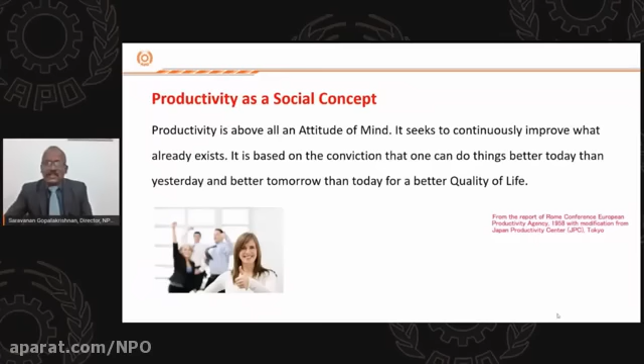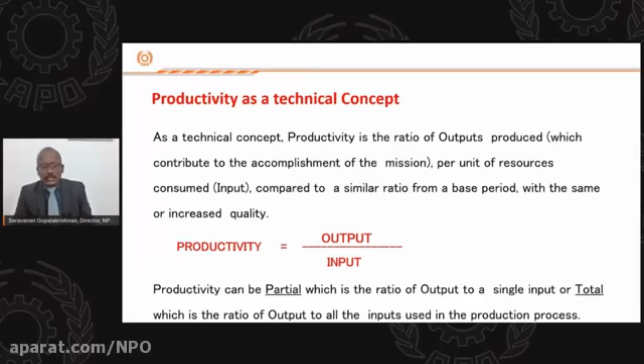So this is not the only perspective. If you see the technical concept of productivity, the explanation is that productivity is a ratio of output by input. Whereas output is only one factor, the input is not only one thing. Our productivity can be increased by reducing the input. The input is a combination of various factors like C, L, E, M, S, where you can see the definitions.

C stands for capital, L for labor, E for energy, M for material, and S for other services. When we are focusing on improvement of productivity, or on continuous improvement, we can reduce the input. The input can be reduced by reducing any factor or many factors. For example, let us discuss a hypothetical situation where energy and material remain constant, and if we are focusing only on capital, labor, and other services, certainly there will be improvement in productivity and there will be continuous improvement. But we tend to consume the same level of energy and the same level of resources.

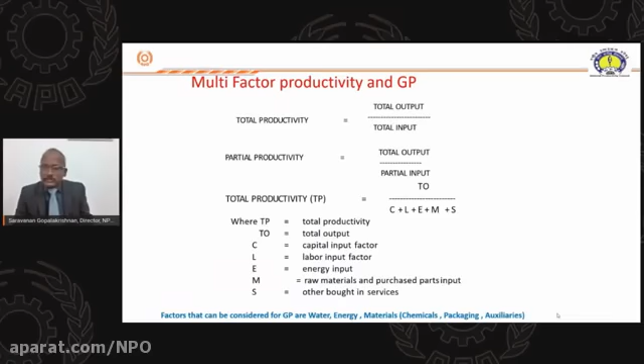Now the question which comes to our mind is: is it sustainable? Now we are having continuous improvement, we are having improvement in productivity. Is the development sustainable? So instead of merely focusing on productivity, where the focus is on reducing some factors of the input, we started speaking about green productivity.

In green productivity, the thrust is given on the reduction in the factors of input, which are energy and material. For example, if you reduce the energy or the material, which are finite in nature, if we can conserve this energy or conserve this material, we are not only looking at development, we are looking at sustainable development, which meets the needs of the present without compromising the ability of future generations to meet their own needs.

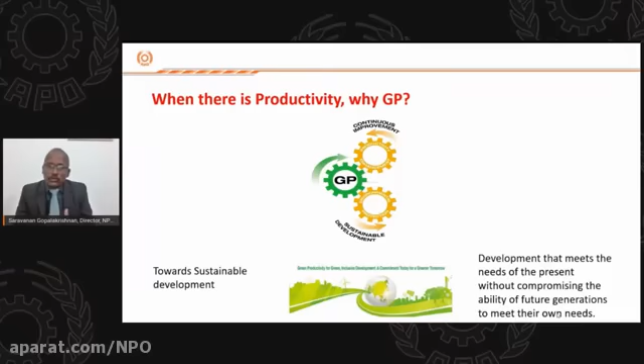So when productivity is focusing merely on continuous improvement, green productivity is focusing on two sides. It is focusing on continuous improvement also, and at the same time, it focuses on sustainable development also. So we will have multiple benefits out of green productivity.

This green productivity is a concept propagated by the Asian Productivity Organization, whereas similar tools, technologies, or techniques are followed by many countries or multilateral agencies, calling it by different names. These other names include pollution prevention, waste minimization, cleaner production, waste reduction, and eco-efficiency. Even in India, in the last portion of the 20th century, the Government of India encouraged organizations to adopt a similar concept through waste minimization circles. What we're discussing now is similar to waste minimization, but the name given to this concept is green productivity.

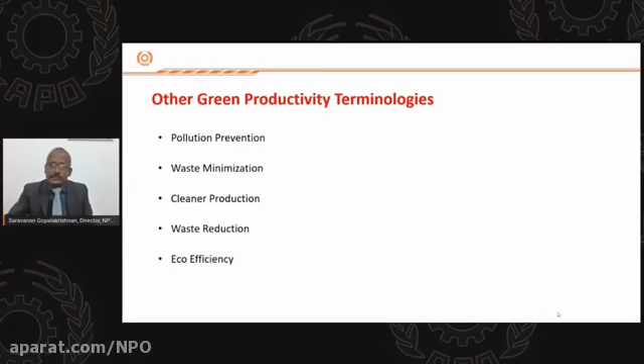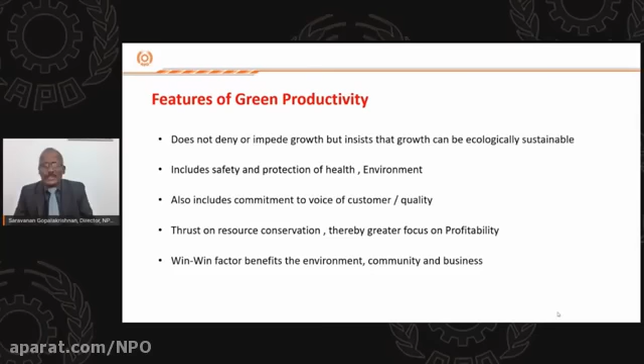What are the important features of green productivity? For example, tools which tend to reduce emissions or material consumption often don't focus on profit or such things. Whereas green productivity, when focusing on reducing emissions or material consumption, in no way impedes growth. It also focuses on profitability, and gives due importance to safety, health, and environment. So it's a win-win factor for the environment, the community, and also business people.

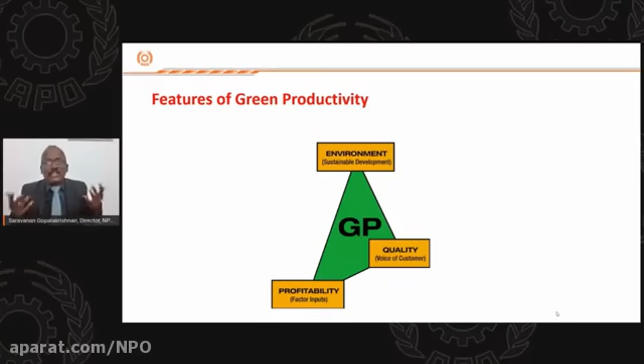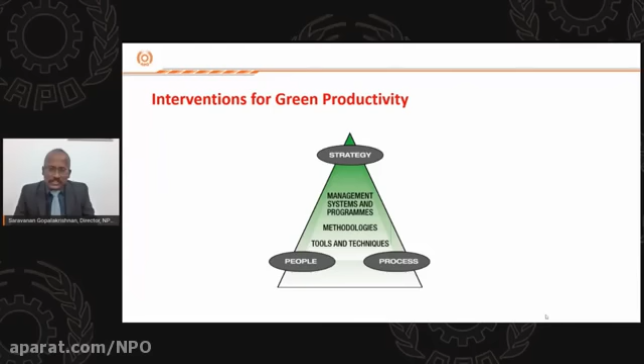So when there is much benefit from green productivity, how can organizations implement it? What should be the intervention for green productivity? There are three important stakeholders: one is people, the other is process, the third is strategy. By selecting or involving people through a good process and a well-defined strategy, green productivity can be attained by the organization. Towards attaining this, there will be a lot of tools, technologies, techniques, methodologies, and also systems and programs.

In a nutshell, logically speaking, how do we achieve green productivity? The first step is to identify where the wastes or emissions are generated. The second is why the wastage or emissions are generated. The third is to find a way these wastages or emissions can be eliminated. Logically speaking, these three are the main things: first, identify where wastages are coming from; second, why they are coming; third, whether it's possible to eliminate them. If it's not possible to eliminate, can we at least minimize the wastages? This speaks about the total green productivity.

As mentioned in the previous slide, a variety of tools and techniques could be used towards green productivity. Some time-tested tools aimed at reduction of wastages can be used for attaining the objective of green productivity as well. Such tools are lean manufacturing tools, and also one important tool called material flow cost accounting.

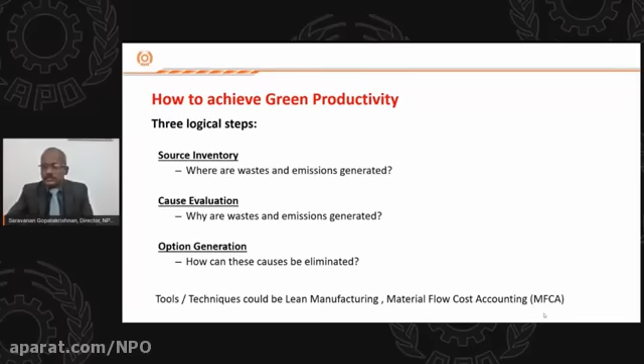I am very much fascinated by one important quote of Mr. Picasso, a well-known artist. As a green productivity practitioner, I am fascinated with his quote where he describes art as removing unnecessary things. As a green productivity professional, my role or intention is also to identify the unnecessary things, identify the wastages, and eliminate them.

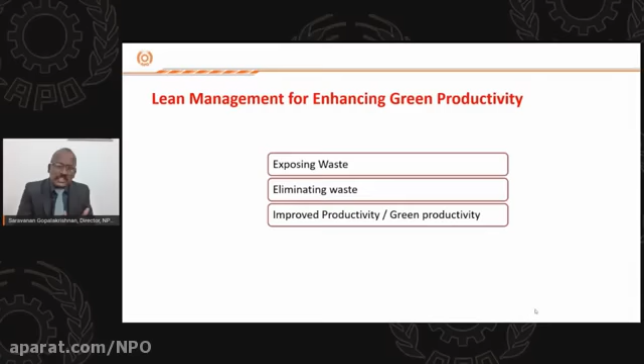We are going to discuss two tools or techniques: one is lean management, the other is material flow cost accounting. Let us start with lean management. This lean management is nothing but a set of tools and techniques aimed at exposing the waste and eliminating it towards improved productivity, or green productivity.

If we have to implement lean, we should be very clear with one important terminology or concept. One is value added activity and the other is non-value added activity. If you go to any organization, there will be a lot of activities happening, but can we say all activities are adding value to the process? Certainly not. Value added activity is the activity for which the customer is interested to pay. Non-value added activity is the activity happening in the process about which the customer is not interested, or he or she is not going to pay. Such activities can be termed as non-value added activity, or Muda.

So if you see, lean has a set of tools and techniques which can be aimed to identify different types of wastages. Some tools can be used to eliminate some set of wastages also.

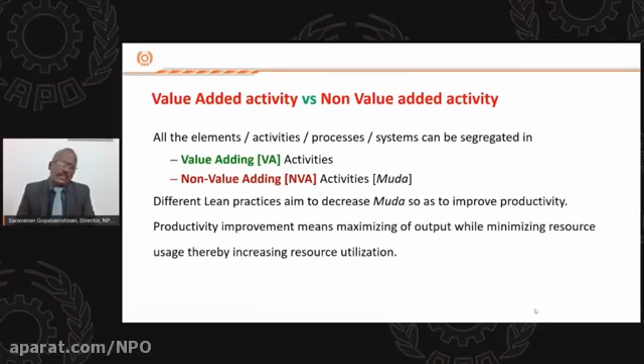If we have to define lean based on the previous slide, lean manufacturing or management can be defined as a systematic way to deliver highest quality of products at lowest cost with the least lead time, with the relentless elimination of wastages. So lean focuses on quality, cost, and time. All these three things are going to be achieved by relentless elimination of so-called wastages.

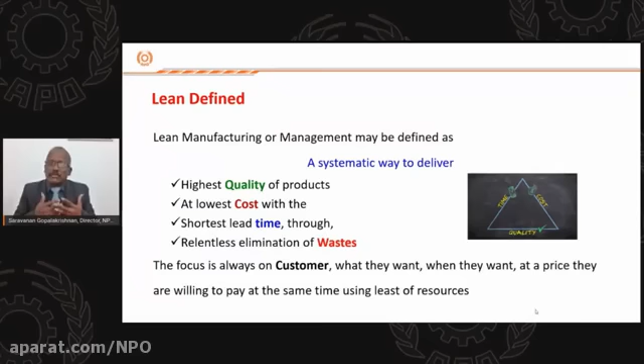And the additional or important thing with respect to lean is the focus is always on the customer - what they want, when they want, at a price they are willing to pay. You can see the last thing, using the least resources. So when we are using the least resources, our end objective of green productivity also will be attained.

If you see this lean concept, as per lean manufacturing, there are 7 different types of wastages. Those wastages can be described as overproduction, excess motion - it may be the motion of operator or machine - excess waiting, which can be the waiting of operator or machine, excess transportation, mostly predominantly material being transported in organizations, over processing, excess inventory, and defect, rework, or scrap.

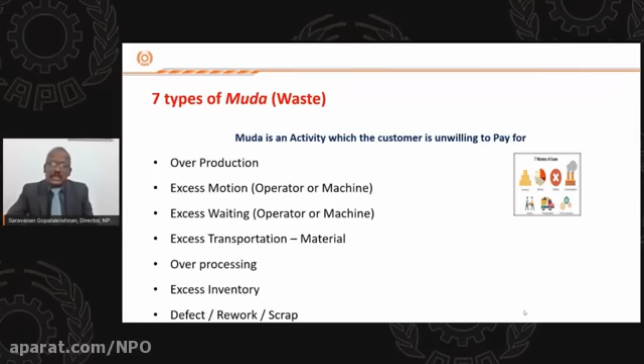If you go to any industry and ask about waste, by and large people feel that defect, rework, or scrap is the only waste in their organization, whereas they are not concerned about the previous 6 types of wastages. But as per lean, all these 7 are equally important and have to be identified and eliminated. Let us see one by one.

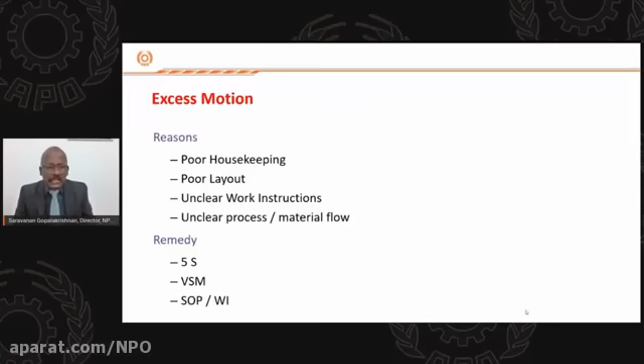The first wastage is excess motion. What could be the reasons for excess motion? It may be because of poor housekeeping, poor layout, unclear work instructions, or unclear material flow. If these reasons are prevalent in the organization, there is some remedy from lean manufacturing - this could be 5S, value stream mapping, SOPs, or work instructions.

The second important waste as per lean is waiting. It may be because of the operator or machine. The main reasons for waiting may be imbalanced line, excess workforce - the workforce may not be flexible - unscheduled maintenance, high setup time, and also sometimes shortage of material or manpower.

If these are the reasons, then the remedy for removing waiting is line balancing, value stream mapping, total productive maintenance - this will help you improve your maintenance practices and increase machine availability - and SMED, single minute exchange of die. So if there is any problem with your setup time taking too long, that can be reduced through SMED.

Just in time - for example, if you are getting the material too much in advance, it has to wait till you start focusing on it for the operations. So on the other hand, if you are having a practice like just in time, it will help your vendor give the material in the stipulated time, so that unnecessary or unwanted waiting of material can be avoided.

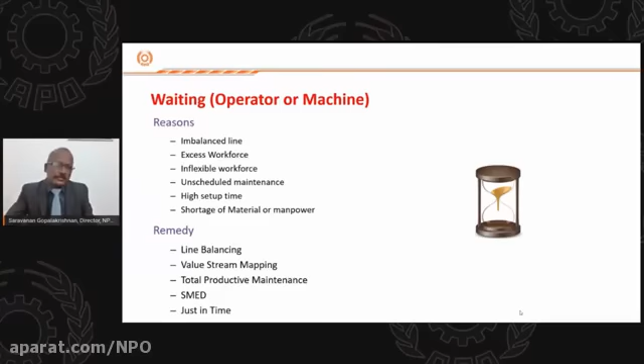The third, and most cruel waste in the organization, is transportation, because transportation is mostly of material. Because of transportation, sometimes there are damages happening to the material. It is affecting the safety of the workers also. It involves sizable resources - in some organizations they use energy for transportation. So this is the most cruel wastage as per lean.

If you want to improve your productivity or implement lean, one of the first steps could be to identify wherever you are having this unwanted transportation. The reasons for excess transportation could be poor layout, poor route planning, distant suppliers, and line imbalance.

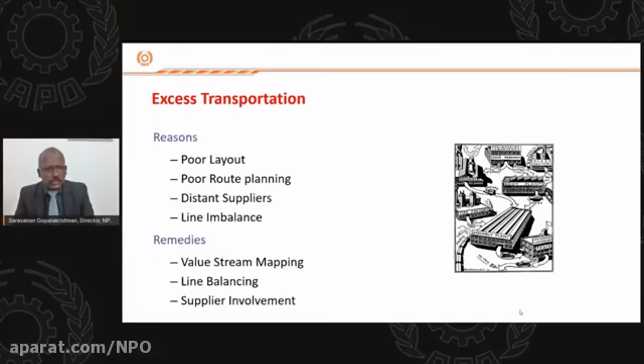The remedies for these reasons could be value stream mapping, line balancing, and also supplier involvement.

Another type of waste as per lean is over processing. The reason is unclear customer specification. If your operator or organization does not know the exact requirement of your customer, you will tend to do as per your perception, so sometimes you will do over processing. Other reasons could be frequent design changes and excessive quality changes. Whenever there are frequent changes, people are not clear what they are supposed to do. To be cautious, they start doing excess, which results in over processing.

There is also inadequate value analysis. Whatever you are giving to the supplier should fetch you some value, or give some value to the customer. For example, if I am doing something for $1, is it worth only $1? For selling something at $1, I should not start processing equivalent to $1.5. So there should be some value analysis also.

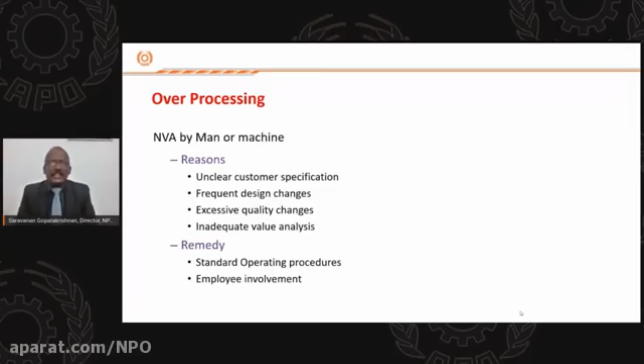So the remedy for over processing could be standard operating procedures and also employee involvement.

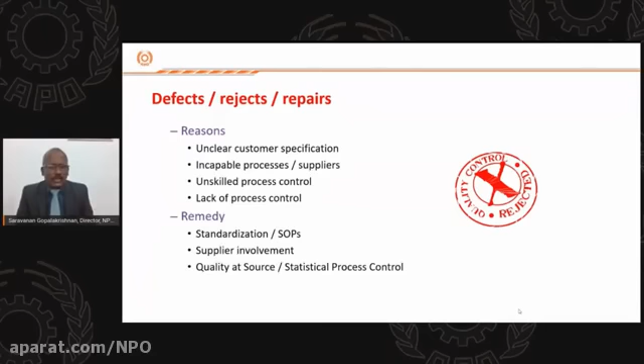The other normal wastages prevalent in the organization are defects, rejects, and repairs. The reasons may mainly be lack of process control, unskilled process control, incapable process, and sometimes unclear customer specification. The remedy for these defects is standardization, supplier involvement, quality at source, or implementation of tools and techniques like statistical process control.

The next type of waste as per lean is excess inventory. The problem with this inventory is that it may be raw material, WIP or work in process, or finished goods. There are two main problems with excess inventory. One, whenever we store things for more time, there is a chance the material can deteriorate, resulting in loss of material due to storage over time. Second, whenever you store material, you are blocking capital. Nowadays organizations have a problem of cash flow. So whenever you reduce inventory, you have two benefits: you prevent material from unwanted damage or deterioration, and you increase the cash flow of the organization by avoiding blockage of capital.

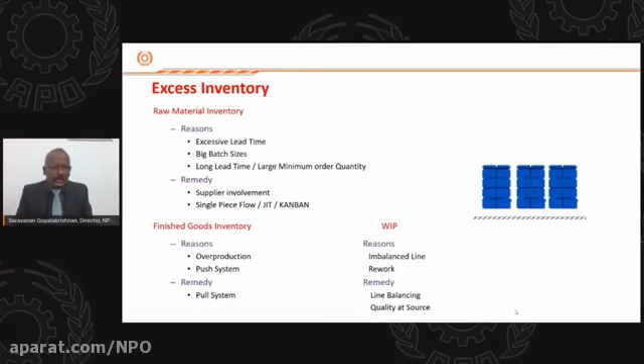So the remedy could be concepts like JIT, Kanban, line balancing, and pull system.

Similar to inventory, whenever you are producing more - for example, if I'm supposed to sell 10 units but I make 20 units of that product, 10 units will be sold to the customer and the remaining 10 units will be stored in my warehouse. The reason for this could be push system and unclear customer requirements. Again, similar to inventory, there are two main problems: whatever product I am storing in my warehouse can become outdated, can get damaged, can get deteriorated, and second, I am blocking capital. So lean is aimed at avoiding overproduction.

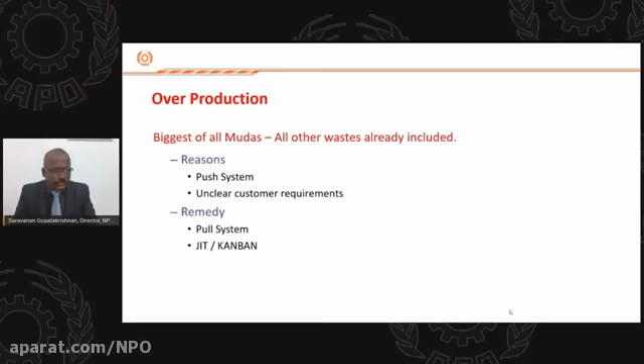That could be achieved through pull system or concepts like JIT and Kanban.

So in the past 10 minutes, we have discussed 7 different types of waste. If anyone is interested in the implementation of lean and eliminating this wastage, what should be the way forward? The first thing should be you visit your shop floor and classify the elements as value added or non-value added activity.

Then the wastages can be eliminated by these 4 easy ways. First, find out: can we eliminate the non-value added activity? Ideally we should eliminate it, but practically it won't be possible to eliminate all non-value added activity. So wherever feasible, we should eliminate it; wherever not feasible, we should try to minimize it.

The second thing is, wherever some activity is happening, can we combine the activities so that we can do it with less resources - maybe with less manpower, less material, less energy.

The third thing could be rearranging. In some cases, rearranging will result in the reduction of time, and also the reduction of resources.

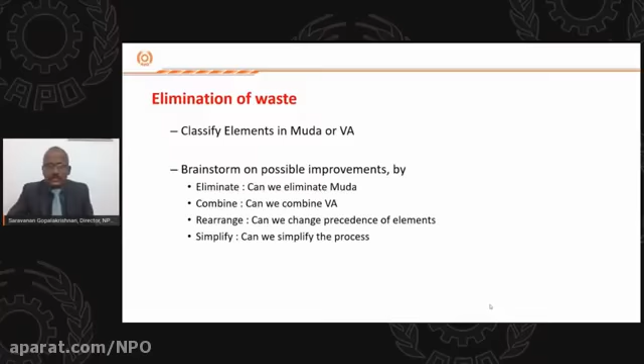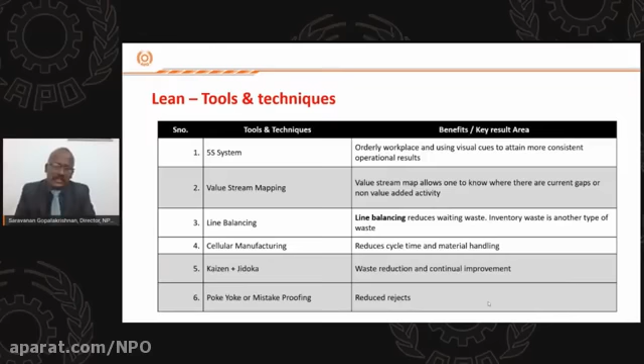As I was telling earlier, this lean manufacturing is a set of around more than 13 tools. Each and every tool has some benefit. It can be targeted or implemented based on what is called diagnosis. Whenever you go to the organization to implement lean, first of all you identify what is happening there.

When we discussed the 7 wastages, the first thing we saw was what is the problem. Based on that problem, the solution should be some of the lean tools. For example, if the workplace is not in an orderly fashion, certainly the solution is 5S. Other example: if you feel there is a lot of non-value added activity, then the organization should go for the implementation or practice of value stream mapping.

At each and every place, what is the value added activity? What is the non-value added activity? How can it be reduced? So tools like value stream mapping will help you reduce the non-value added activity.

The third thing is line balancing. As we saw, when there is a lot of waiting, it may be because of lack of balance. If one activity takes 10 minutes and another takes only 5 minutes, and if all are in the same line, the second person will be waiting for 5 minutes till the previous process is completed in 10 minutes. Line balancing is aimed at having all the work centers with similar or the same cycle time.

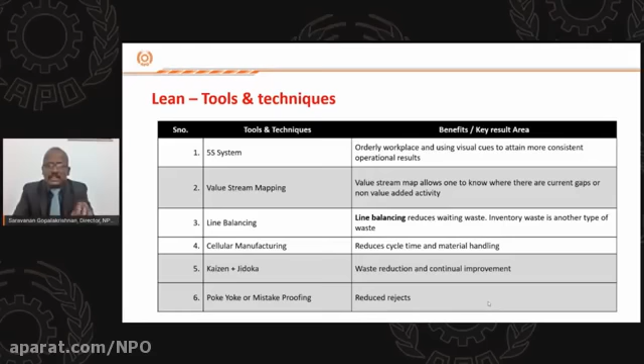Other tools may be cellular manufacturing, Poke-Yoke, just in time, Kanban. Whenever you have a problem with the availability of machines, whenever you want to improve your overall equipment's effectiveness, you can go for tools and techniques like TPM, single minute exchange of dies.

If you are having a problem of too much setting time, SMED is a tool for you. Whenever you have a lot of quality rejects and such things, you can go for statistical process control. When there is a lack of consistency, you can go for standard operating procedures.

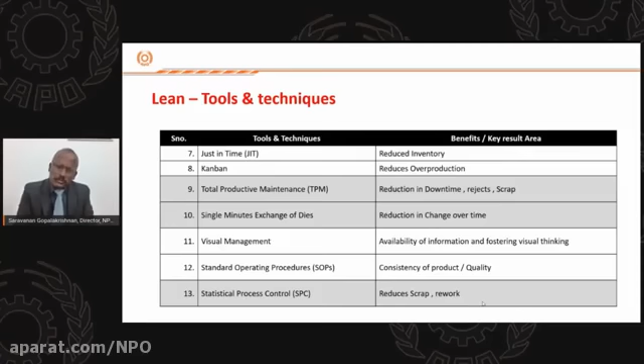So we have different lean tools and techniques based on the necessity or the problems on the shop floor. We can implement these different types of tools and techniques. Earlier, these lean tools and techniques were implemented only on the shop floor, but nowadays these lean tools and techniques are equally implementable in the service sector also.

Now we have discussed the concept of lean. Now I would like to share some success stories of lean implementation in India by the National Productivity Council.

The government of India observed that this lean is a very important tool for improving competitiveness. It observed that major corporations are able to hire consultants and implement lean, and their competitiveness is increasing. Whereas in India, there are a lot of micro, medium, and small scale enterprises which are manned by very few people.

Their capital is also very, very less. They are not having the approach to hi-fi consultants. So the government of India came out with the scheme, Lean Manufacturing Competitiveness Scheme.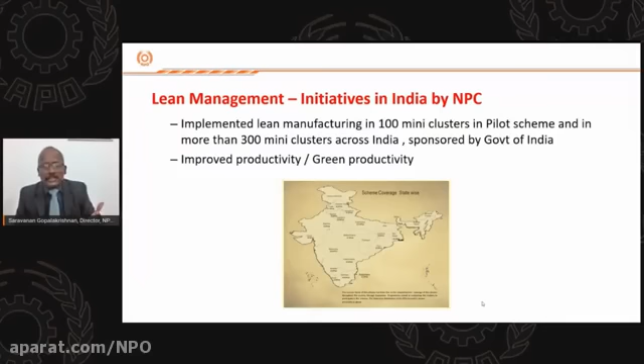When I speak about the 400 mini clusters, each and every cluster may be having from 6 to 10 units. If we take an average of 8, 400 into 8 is 3,200 MSME units. The National Productivity Council implemented this lean manufacturing and helped them improve their productivity and at the same time increase their competitiveness.

Let me share some of the cases. So this is about the organization. You see, after the diagnostic study, they came out with a conclusion.

The main problem for the time being was their customer rejection was very high, and their internal rejection was also very high. Then we started implementing this lean tool to find out the different reasons for the customer rejection and also the internal rejection. We came out with different reasons, collected the data, and put it in the Pareto chart or Pareto diagram.

So we concluded that there are three major reasons attributing to sizable rejections. One is reamer change time is not fixed. Based on internal discussion with suitable input from the machine manufacturer and other service providers, reamer change time is fixed, work instruction is prepared, and control points were displayed wherever possible.

The other thing pertains to operators. Some are not aware of the work instruction; they are not given due training. So reamer change time is fixed, work instruction has been prepared, and control points were displayed. Through this, the top three reasons were addressed.

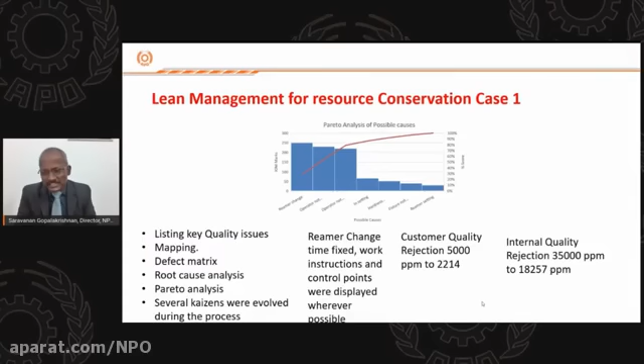Immediately we saw improvements in the quality trend. Customer quality rejection came down from 5,000 ppm to 2,214 ppm. Internal quality rejection came down from 35,000 ppm to 18,257 ppm. This reduction in rejections led to a sizable reduction in resources like material and energy. Customer satisfaction and employee satisfaction also improved.

The second case pertains to an organization using a cupola furnace. Based on comparison with peers, they found they were using a lot of bed coke for heating in the cupola furnace. They found their bed coke consumption was very high compared to other organizations. We started probing this issue.

First question we asked: where are you using the bed coke? Why are you using it? How much are you using? What is the reason for using this much quantity? In some places they gave answers, but they had no justifiable reason for using 500 kgs in a batch.

Then we took some trials at 500, 475, 450, and 425 kgs. To our surprise, when firing the cupola furnace with 500 kgs of bed coke, they were having quality problems and fluidity issues. But when firing with 425 kgs, there was a sizable reduction in bed coke used, and quality and fluidity increased.

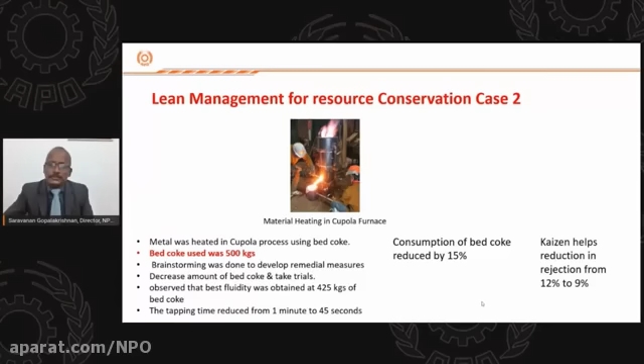The third case: we saw an organization unhappy with the finishing. We probed further. What is your problem with the finishing? They told us that some operation happens after painting, and the paint peels off or goes away. We probed further.

Before that operation, they were doing some cutting. When we asked why there was a need for cutting, they said the teeth had extra size, so cutting was needed. We asked why the teeth had extra size.

We saw the pattern. The pattern had the highest value in the specification range. The teeth was made at the highest level in the pattern, so only the teeth had extra dimension, which needed to be cut after painting. This cutting caused damage to the finishing. So we concluded the pattern needed to be modified with a reduced specification.

The pattern was made with a reduced specification, and the unnecessary cutting was avoided. This saved material and brought down rejections. This was done for one product, and once done, it can be horizontally deployed for multiple products in the organization.

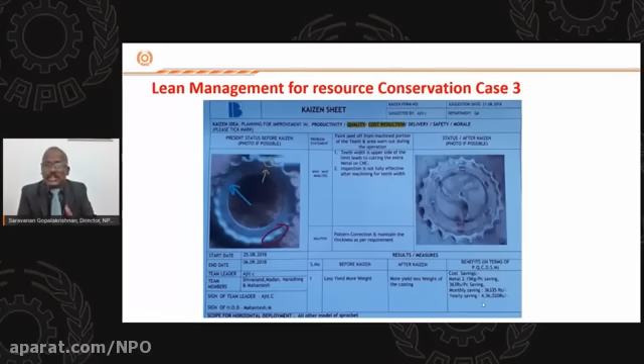For example, with this one product alone, they were able to save around 4,36,000 Indian rupees. Since they are all MSME units, 4,36,000 rupees per annum as a recurring saving is a very, very big improvement. The fourth case I would like to discuss is where material is stacked in wooden boxes or wooden packed containers.

They started with a problem: excess requirement of space for wood storage. We probed further: why do you want excess storage? There's a requirement for storing the wood. Why do you want wood? We need to stack our material in the wood. And that wood is also not reusable.

From the wood, we designed a collapsible steel container, which is reusable. Now the space problem is also solved, and material consumption is reduced drastically. The cost saving is to the tune of 6 lakh Indian rupees, and that is recurring every year.

So from these 4 cases, you might safely conclude that lean is a very important tool which helps in the reduction of wastages. It can also be used in the reduction of resources. In all 4 cases, the investment required is very less, maybe except the 4th case where there is a minor investment. In the other places, there is no investment at all, whereas the benefit is to the tune of many lakhs of rupees. So this is all about lean manufacturing.

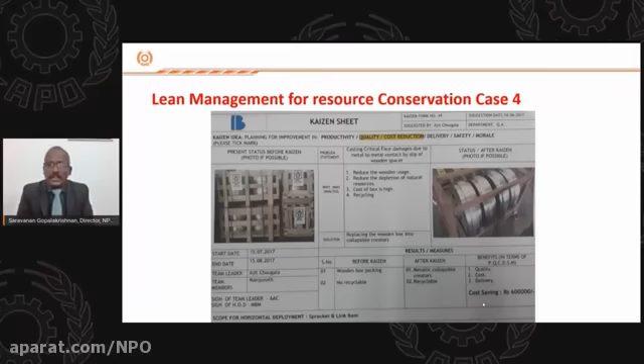Now let us go to the other concept, MFCA. This material flow cost accounting is a tool developed in Germany in the late 1990s, and in Japan more than 300 companies have adopted it. It can also be used in conjunction with the environmental management system, that is ISO 14000 family.

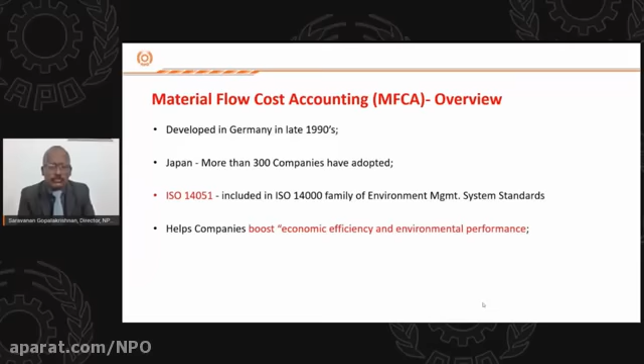Material flow cost accounting is a tool which helps you identify how the material is flowing. It increases the transparency of material use practices. Once you know how much material is used at what places and what output you are getting, you can take suitable interventions or actions to reduce unnecessary wastages. There are 2 important perspectives of MFCA evaluation.

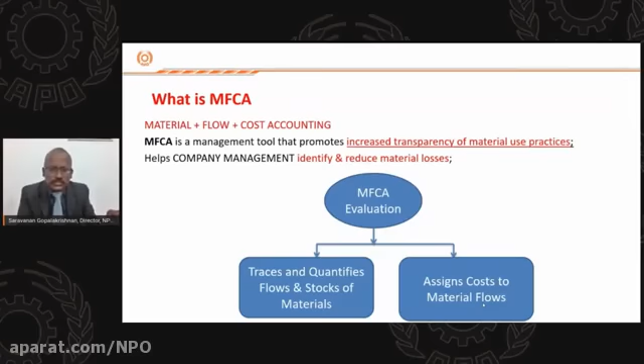The first thing is it traces and quantifies the flows. The second thing is it assigns cost to each and every material. There are 4 cost elements as per material flow cost accounting: first, material is costed; second, energy is costed; third, whenever we do some process, because of labor, depreciation, maintenance or transportation, we incur some cost, so we assign cost to the system also; fourth, the cost incurred towards waste management, that is waste handling, storage, treatment and disposal, reworking of rejected products, recycling, etc.

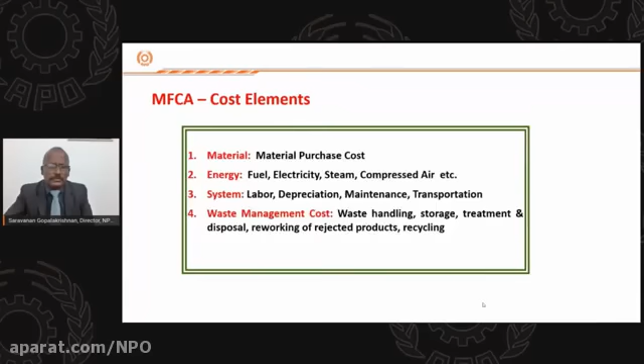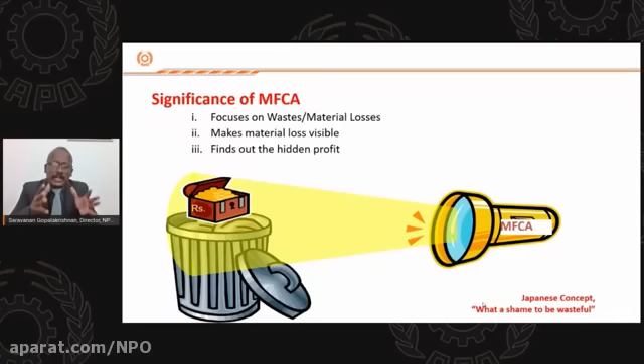The significance of MFCA: we all speak about waste, but the thing which is waste for us may be useful for somebody else. So we should not use the term waste at all. Here is a Japanese concept, what a shame to be wasteful. So nothing is waste. Once material loss is visible, you find the hidden profit. When there is a lot of material loss, MFCA helps you identify where the losses are, and then you can come out with a good solution.

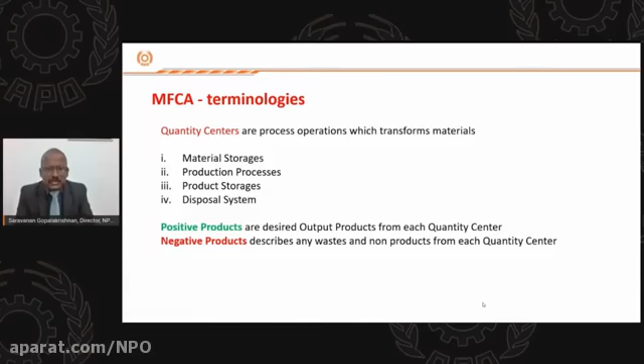When implementing material flow cost accounting, three terminologies are very important. The first is quantity centers, that is the place where material is stored, or production process happens, product is stored, or the disposal system - the place where material comes in, something goes as output, something goes as waste. The next is positive products - whatever we call the product or useful output. Whatever we termed as waste is not really waste; it can be termed as negative products from that quantity center.

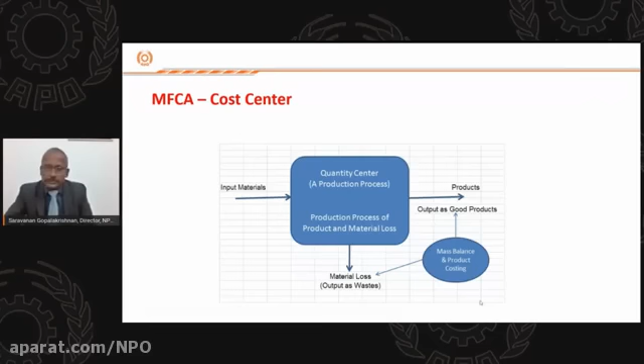You can see the pictorial representation of a quantity center. It is nothing but a place where some production or activity happens. You give some input materials, and there will be output from that work center as good products. From that work center, some so-called wastages may go out, maybe in the form of solid, liquid, or gas. You find out what are the losses or negative products coming from that cost center. Once you identify these negative products and assign value to them, it gives a lot of visibility. Once you know how much is being lost in that place, you can come out with a suitable intervention to reduce the loss. The name itself tells about material flow cost accounting - there is traditional cost accounting, and now we are discussing material flow cost accounting.

In traditional cost accounting, the total cost is attributed to the good product. No amount is attributed to the negative product; only the waste disposal cost is accounted for. Whereas in MFCA, whenever some negative product is coming, some amount of material and resources is used there, so some financial value has to be attributed to the negative product. And then, as usual, we should attribute some waste disposal cost also.

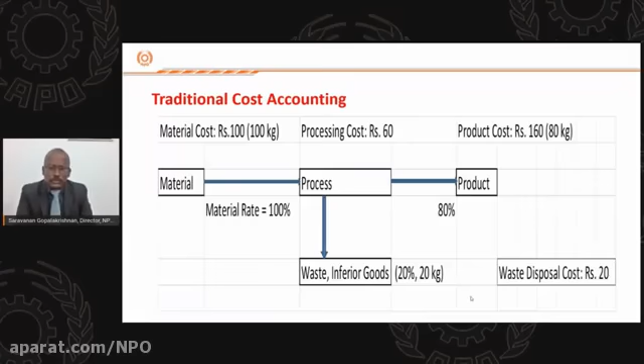Let us take a small example. We take 100 kg of material which costs 100 rupees. Some process takes place where the good or positive product is 80%. For getting this 80% of product, we incur a cost of 100 rupees in material and 60 rupees in processing, totaling 160 rupees for 80 kg of output. The negative output is around 20 kg. No financial value is attributed to this 20 kg; we only see the waste disposal cost, which is 20.

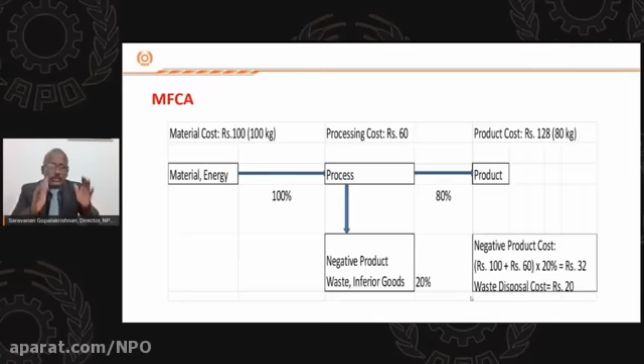On the other hand, if you see this in material flow cost accounting, the positive product is still 80%. Out of the total cost of 100 plus 60 rupees, 80% is attributed to the positive product, which is 128. The negative product is around 20%, and 20% of 160 is around 32. The value of the negative product, including material and processing cost, is 32 rupees, and the waste disposal cost is 20. You can see the difference between traditional cost accounting and MFCA.

In traditional cost accounting, no cost is attributed to the negative product, so it is 0. Only waste disposal cost is shown, that is 20, so the total cost is 20 rupees as per traditional accounting. Whereas in reality, as per MFCA, some amount of material and processing is being wasted, accounting to 32 rupees, plus the waste disposal cost of 20 as usual. So the total cost of negative product is 52 rupees. In traditional cost accounting it is 20, but as per MFCA the total cost of the negative product is 52.

Once you come to know how much cost is being spent or wasted, then you will come out with a methodology to reduce it.

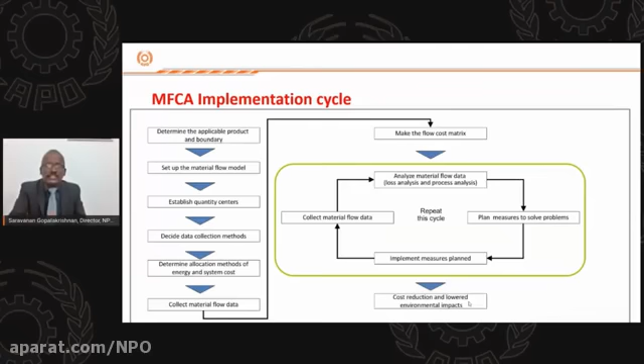We are ideally aiming at a place where 100% will be positive product. So today I may have 80% positive product and 20% negative product. I may come out with a solution to reduce the negative product from 20% to 18%. Is my journey over? Not necessarily, certainly not. Then I have to reduce the negative product from 18% to 16%. So this is the MFCA implementation cycle.

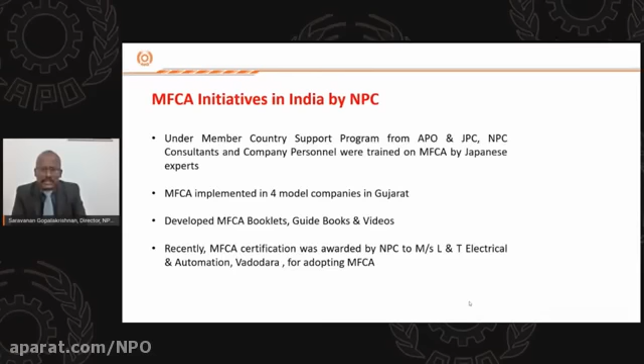Even in MFCA, the National Productivity Council, in association with the Asian Productivity Organization and JPC, carried out some pilot projects. We identified 4 model companies in the state of Gujarat in India and implemented material flow cost accounting. There was sizable benefit accrued because of this MFCA. The Government of India also supported the National Productivity Council to propagate the MFCA concept through booklets, guidebooks, videos, and training programs. Recently, MFCA certification was awarded to one prominent corporate in India, L&T Electrical Automation, in the state of Gujarat.

I will share 2-3 cases of MFCA. If you take any MFCA, the focus will be on the packing also. Before the implementation of MFCA, the product was 100% covered. But if you see the customer's specification, they're worried the product should not be damaged during transit, not that it should be 100% covered. So the question arose: is 100% covering required, or would 80% covering be okay? That solution also cropped up.

The second thing is the thickness of the wood - is that much necessary? So we came out with two interventions: one, the quantity or coverage of the wood is reduced; second, the thickness of the wood is also reduced. The benefit accrued is a sizable reduction in wood usage, which is a recurring benefit in terms of lakhs of rupees.

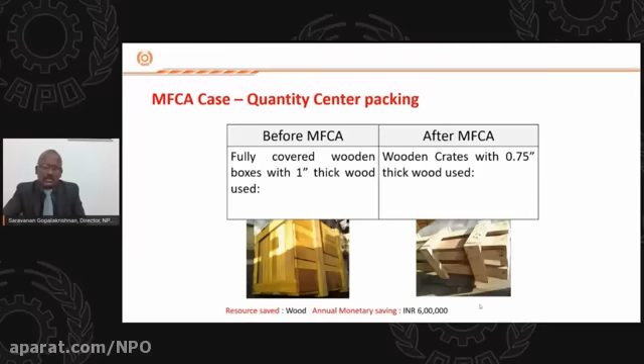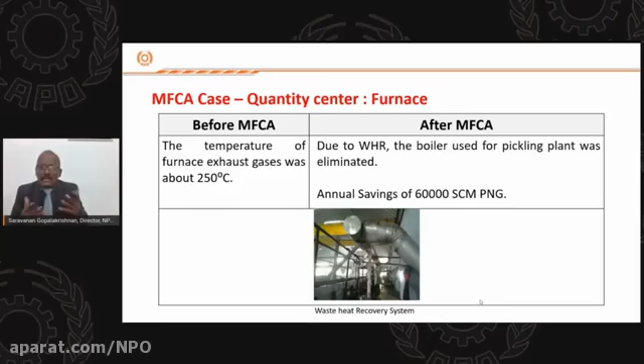The other thing is, when we implemented MFCA, one important waste that goes out is waste air with some heat. Whenever we send gaseous emissions from our organization, if it goes out with heat, that is nothing but energy. So when implementing MFCA, we came out with a waste heat recovery solution. Because of this, when the exhaust gas was going out at around 250 degrees Celsius, one boiler necessity itself was eliminated, and there is an annual saving of around 60,000 SCM of gas. So these two cases explain how material conservation is possible with tools like MFCA.

Having seen lean manufacturing contributing towards wastage reduction, and MFCA contributing towards material conservation, the National Productivity Council came out with a novel tool - can both lean and MFCA be implemented together? Again we approached the Asian Productivity Organization, and with their help, we implemented this integrated lean and MFCA approach in 4 model units near the capital of India. Let me explain one case - this is a case of a plastic company.

First we carried out MFCA. We were giving around 1,69,691 kg of input, but getting only around 1,26,000 kg of output, with the remaining material going as negative product. Something is lost as rejection, something lost in setting time, something lost because of power failure, but the major chunk is lost because of runner and lumps. The first activity was setting up a quantity center - what input are we giving, what output are we taking - and we concluded the major loss is happening through runner and lumps.

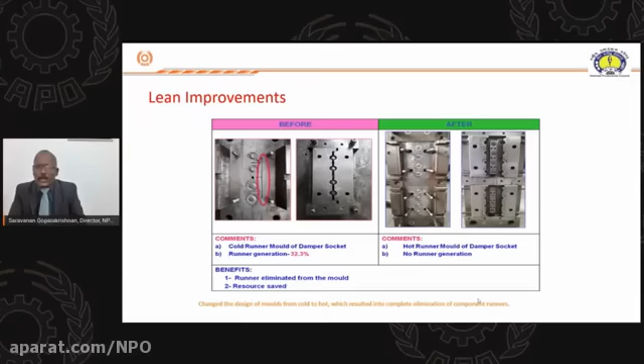So we implemented this. First we adopted MFCA - this much input, this output, with major losses through runner and lumps. Once we identified the problem with MFCA, we started working on a solution using lean techniques - we started a Kaizen. Why was this runner problem happening? We interacted with all the people working in that section, and came out with a solution: instead of a cold mold, if we move to a hot mold, this runner problem can be avoided. By moving from this design to that design, we got rid of the runner problem. This is one example where sizable resource conservation was possible with the help of MFCA and lean.

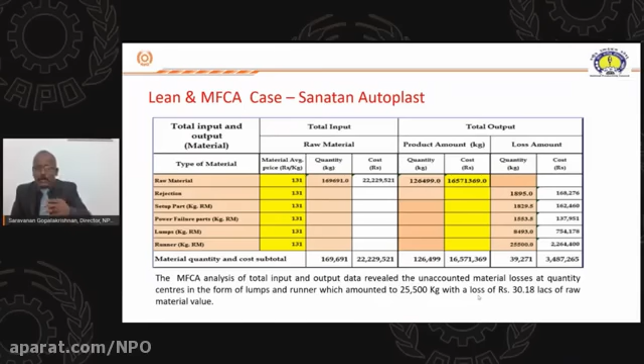In the second place, we implemented MFCA and mapped the energy flow. We observed that 20% of the energy is being used when the machine is idle, which is not a value-added activity. This input was then taken for lean implementation.

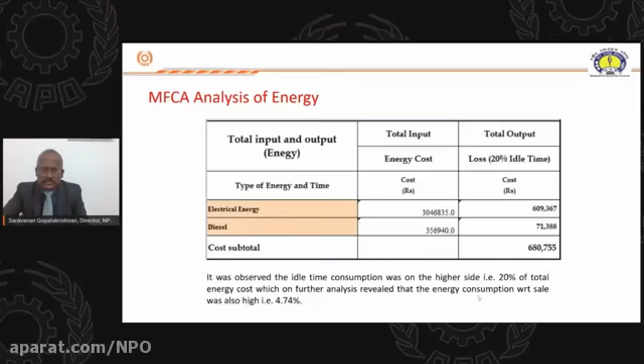We came out with 2-3 solutions. The first solution - when the machine was idle, it was taking a lot of power. One easy solution is that there are technologies available for power saving, but that was not available in this organization. We came out with a very easy idea - when the machine is idling, why is so much energy being lost, why is there no power saving mode? So we installed a power saver.

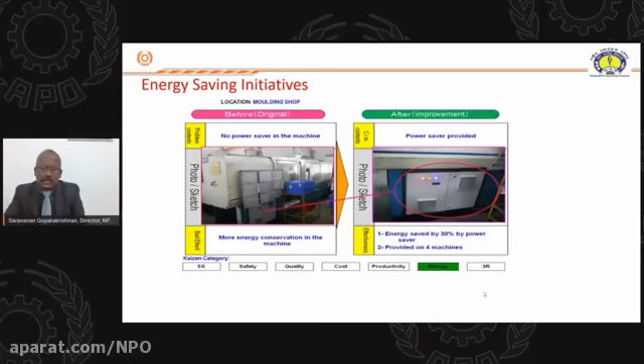The other thing is heat being lost when the machine is idle. So we did a metallurgical study and came out with aluminum cased heaters, where heat dissipation is properly managed, resulting in a sizable reduction in loss.

By having these interventions like power saving mode or coming out with aluminum cased heaters in the barrel, we could save a lot of energy in the organization also. You can see implementation of this lean accrued benefits totaling around 25.61 lakhs at this organization.

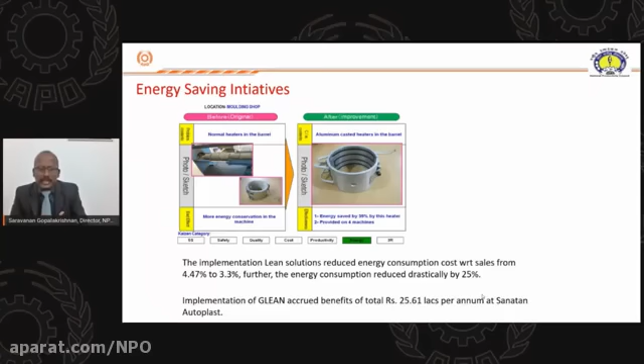I was telling around 5 units were selected for this pilot study with the help of Asian Productivity Organization. We implemented an integrated lean and MFCA in these 5 organizations. You can very well see this integrated approach has resulted in savings. These are all the savings to the organization, and at the same time, there is sizable saving in the material and sizable saving in the energy. It is not only for the business, it also goes well with the environment. We are not only going for development, we are going for sustainable development.

So National Productivity Council, with the help of APO and all, is propagating this lean and MFCA. We coined the term green lean, and we are propagating this concept to various industries. Nowadays we are also conducting a lot of webinars on this topic. This is being propagated, which has good potential to improve the competitiveness of the organization, and also has good potential to conserve material. With this, I would like to conclude my presentation.

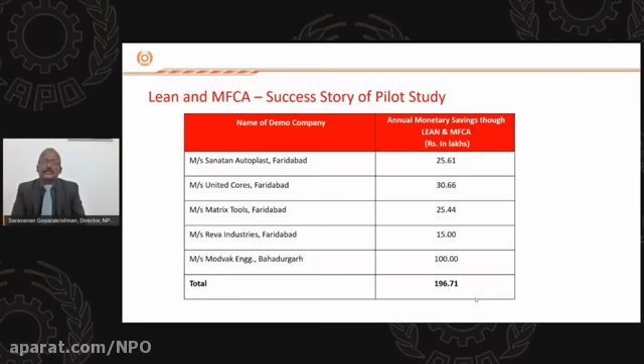First question is on SMEs. Could you explain how lean and MFCA can be effectively introduced in SMEs? What are some typical barriers and how can they be overcome?

Thank you, Mr. Endo. First, I would like to address the barriers. We implemented this lean MFCA mostly in MSME units. The barriers which we observed are: the first thing is lack of awareness. Nowadays there is increased awareness, but even now we have not reached a sizable level where there is good awareness among entrepreneurs about the concept of lean and the benefits which can be obtained from it.

The second thing is about talent pool. If you take the case of MSME units, most of them will have very, very little manpower. They may not be trained or have the required skill set to implement concepts like lean and MFCA.

The third thing is having a wrong idea or mentality that to introduce these concepts like lean and MFCA, we need to have a lot of capital expenditure.